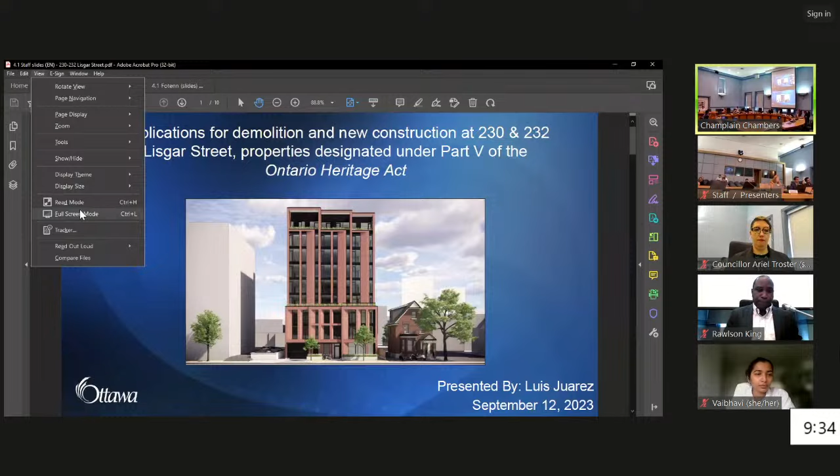So before us is an application to demolish 230 and 232 Lisgar Street and construct a new 9-story apartment residential building. The properties are designated under Part 5 of the Ontario Heritage Act and located in the Centretown Heritage Conservation District. Next slide, please.

The subject properties are outlined in red on this slide. They are located on the northern edge of the HCD boundary, on the south side of Lisgar Street, west of Metcalfe Street, and east of O'Connor Street. Each property contains a 2.5-story front gable house clad in brick, constructed circa 1888, situated immediately east of 3 other similarly scaled front gable houses, south of a 12-story apartment building, and west of an 8-story apartment building. Next slide, please.

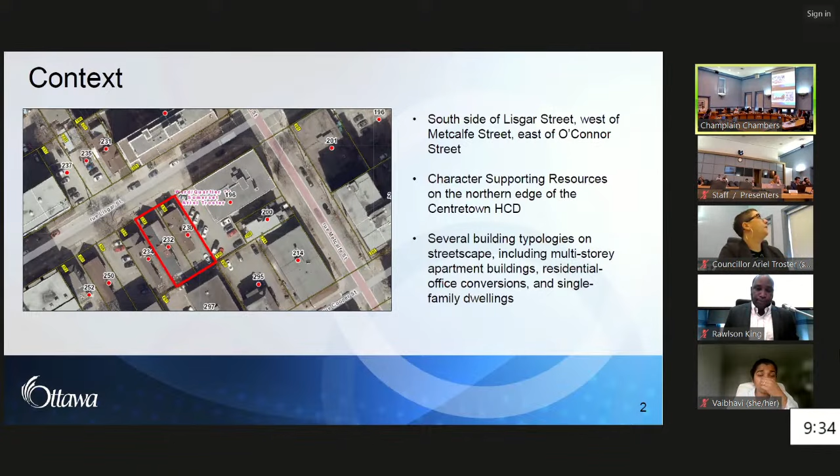These images show the existing conditions of the streetscape and vicinity, with the subject properties shown in red on the left image. You can see that they contain setbacks and heights consistent with the first period of development in the Heritage Conservation District. 230 Lisgar Street on the left has been altered with a 2-story front addition that obscures most of the building's original architectural elements. Next slide, please.

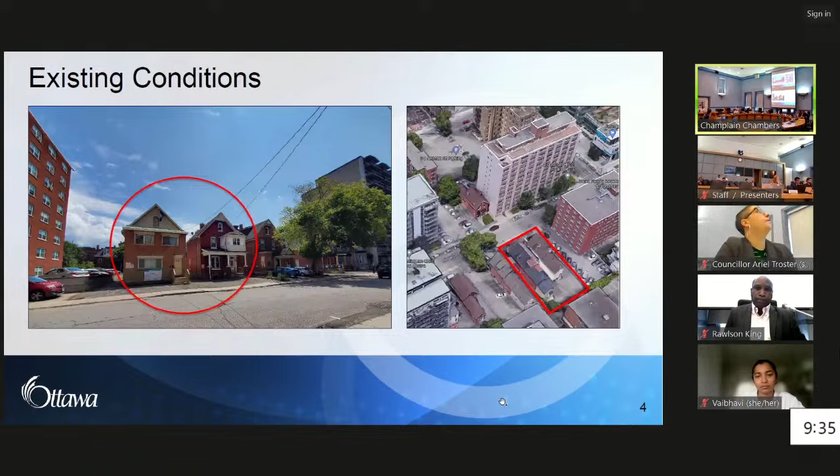As part of this proposal, the applicant proposes to demolish the 2 existing dwelling units, which are both considered character-supporting resources and contributing properties within the Heritage Conservation District. The HCD plan contemplates the demolition of certain character-supporting resources, provided that their removal achieves broader city building goals and that the replacement building is consistent with the HCD plan's new construction guidelines.

As per guidelines for the demolition of contributing buildings in the plan, the applicant has provided an analysis that demonstrates that 230 Lisgar Street has been altered to the extent where its cultural heritage value to the HCD in its current form is compromised by an unsympathetic two-story front addition. That the new building will carry forward some of the perceived attributes of both 230 and 232 Lisgar Street, and that the new building is consistent with the guidelines for new construction and contributes to the city's broader city building goal of intensification. Further, as conditions to the recommendation to demolish the buildings, the applicant will be required to deposit photographs and research material related to the site's existing buildings to the City of Ottawa archives. Next slide, please.

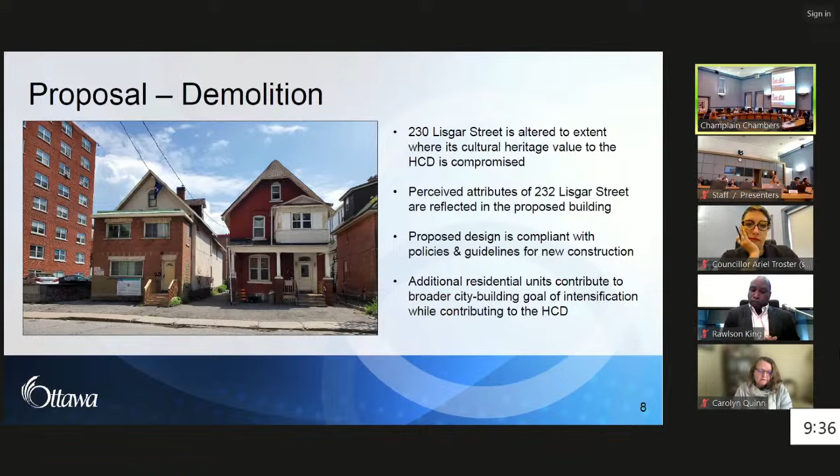The proposed 49-unit building is 9 stories in height. The first image on the slide here on the left is the front elevation as seen from Lisgar Street. Here we see the massing, which consists of 3 distinct vertical bays and includes a 3-story podium and further step back at the 9th floor.

The middle image is of the site plan, and here we see that the proposed building is set back 5.8 meters from the street, providing a transition between the existing building to the east, which protrudes closer to the street, and the existing building to the west, which is further recessed from the street.

We also see the soft-scaped rear yard amenity space, the vehicular access to the underground parking garage via car elevator, and a landscaped front yard inclusive of new plantings, entranceway, and a seating area adjacent to the main entrance.

And then the last image on the right is a close-up on some of the proposed materiality, which consists of red brick cladding on all elevations with perforated metal accents on selected brick returns that mimic some of the decorative patterns found on 232 Lisgar Street's existing woodwork. Next slide, please.

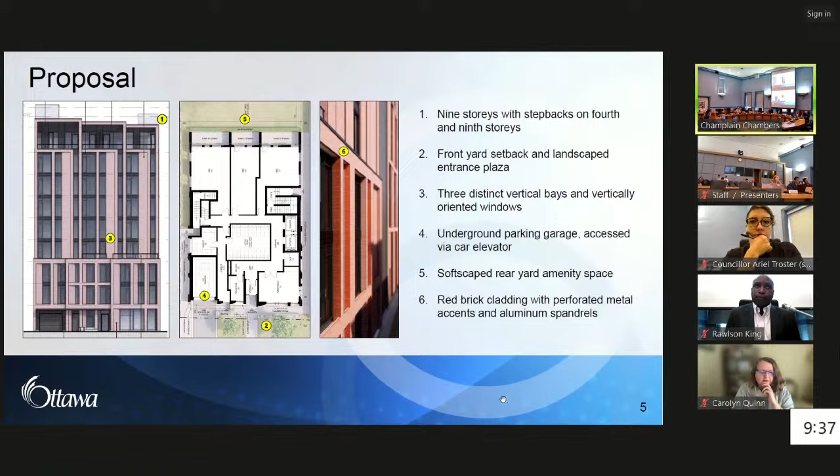Here we have a streetscape elevation along Lisgar Street, demonstrating how the proposed building will interact with the street. The front yard setback will allow for a landscaped entrance plaza that reflects the front porch characteristic of Centretown and eliminates the existing paved condition.

The building's massing, which employs stepbacks on the 4th and 9th stories, will allow adjacent historic houses to the west to remain prominent along the streetscape and to maintain continual datum lines along the row.

The 3 distinct vertical bays and windows will help maintain the streetscape's historic rhythm and provide a successful transition to the neighboring property. And lastly, its red brick and perforated metal detailing mimic materiality that honors the residential character of the HCD. Next slide, please.

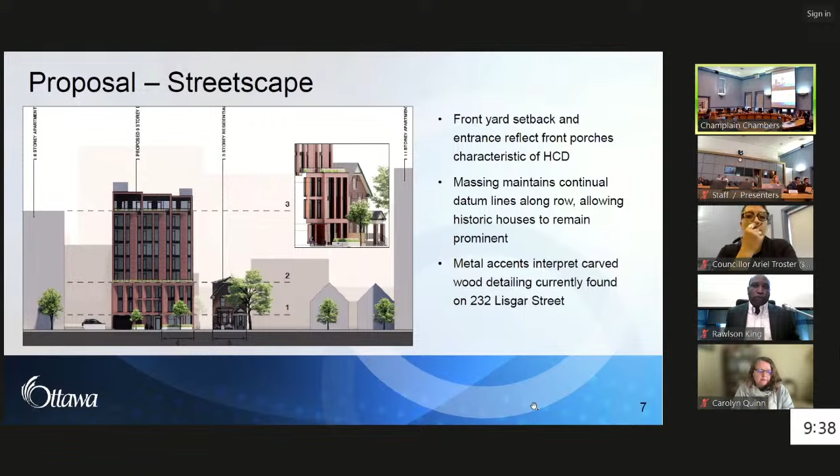Staff are of the opinion that this proposal complies with the Centretown HCD policies and guidelines as they relate to demolition and new construction, and the standards and guidelines for the conservation of historic places in Canada. In staff's opinion, the proposal employs several design interventions to ensure that it contributes to the cultural heritage value of the HCD while achieving the broader city goal of providing additional housing units.

Next slide, please. In terms of consultation, the application submission materials were posted on the city's development application search tool. Heritage Ottawa, neighbors within 30 meters, Chair King and Councillor Troster were notified of the application. And the Centretown Community Association is also aware of the application and participated in the pre-consultation process.

Next slide, please. In conclusion, staff are recommending approval for the proposed demolition of 230 and 232 Lisgar Street and of the construction of a new 9-story building on the properties.

As conditions of approval, staff are requesting that the applicant deposit photographs and research material related to the site's existing buildings to the City of Ottawa archives prior to issuing demolition permits, and that the applicant provide samples of all final exterior materials, including details on the proposed decorative metal patterns, for approval by heritage planning staff prior to the issuance of the building permit.

Staff are also requesting that authority be delegated for minor design changes that might arise and that the heritage permit be approved with a 3-year expiry date. Next slide, please.

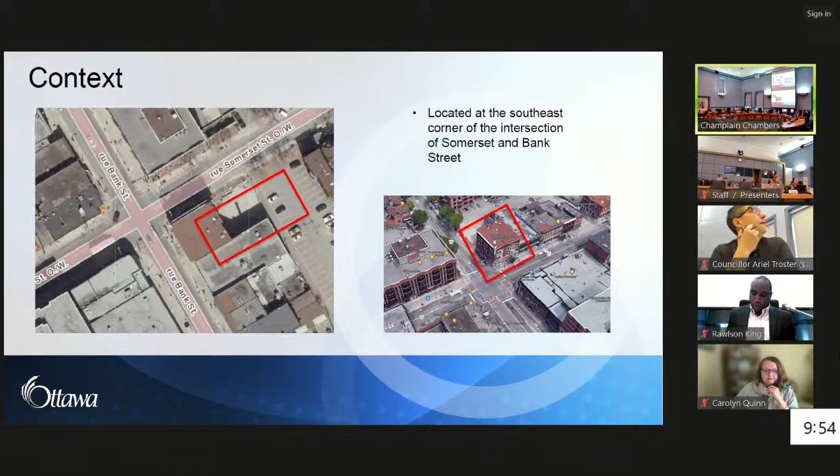Some context and history on the property: it was constructed in 1896 as a department store. In 2007, as part of a renovation project, the building partially collapsed and has remained vacant and deteriorated ever since. It is subject to multiple Building Code Act orders, notices of violation, and property standard orders. It is listed on the city's heritage watch list and is monitored regularly by city staff.

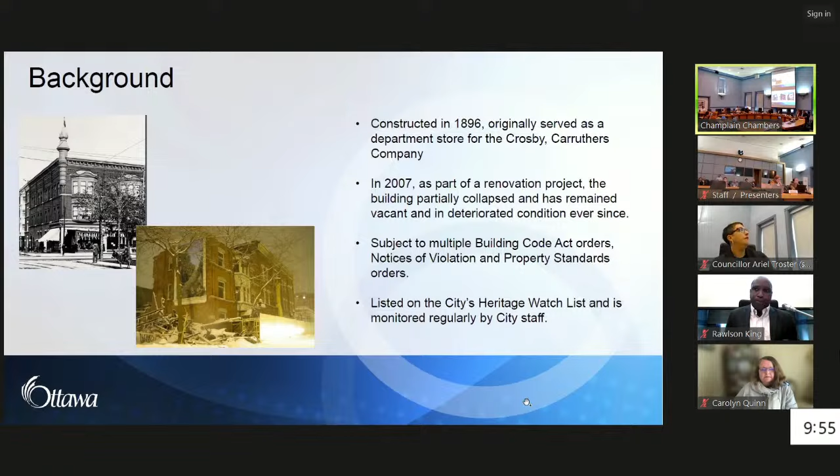These are some photos of the property showing it in its current condition. You can see the deteriorated condition, especially at the rear of the building to the east.

In 2022, Heritage staff brought forward a report to BHC to provide an update and a high-level cost estimate for the immediate urgent work to be undertaken on the building, should the city move to undertake the work. The city has not had to undertake any of the work, as the most critical work was found to not be immediately necessary, and the owner has been working towards compliance with the orders.

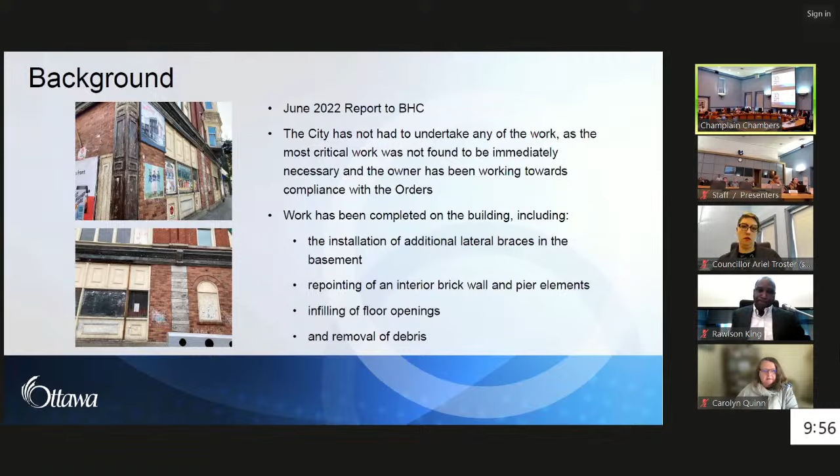Some of the work that has been completed on the building recently includes installation of additional lateral braces in the basement, repointing of an interior brick wall and pier elements, infilling of the floor openings, and removal of debris. Also in these photos, you can see the restoration of the metal cornice at the street level.

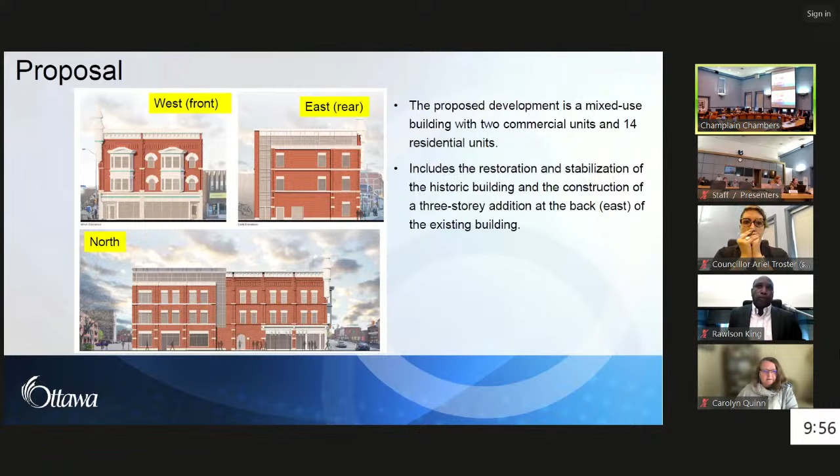In front of you, I think the applicant is here today to do an overview of the proposal, but it basically will be a mixed-use building with 2 commercial units and 14 residential units. It includes the restoration and stabilization of the historic building and the construction of a 3-story addition at the back, to the east of the building.

Some of the rehabilitation elements that will happen: the restoration of the metal cornices and corner turret, replacement of the windows on the 2nd and 3rd story with aluminum windows, repair and repointing of brick, and replacing damaged brick where necessary.

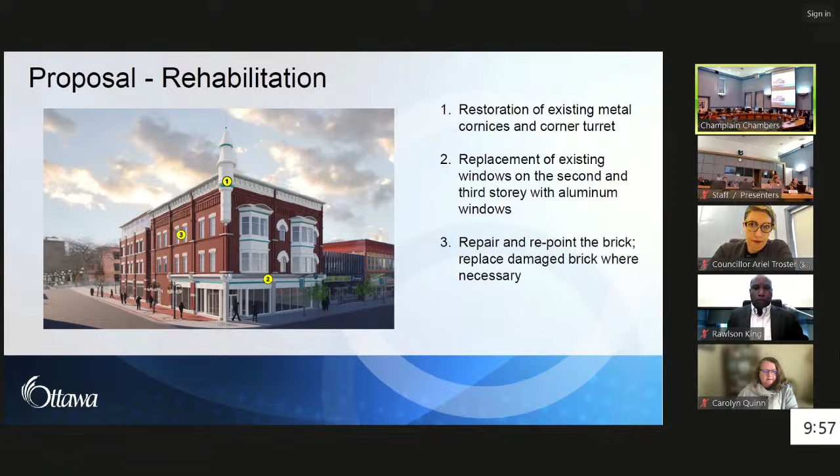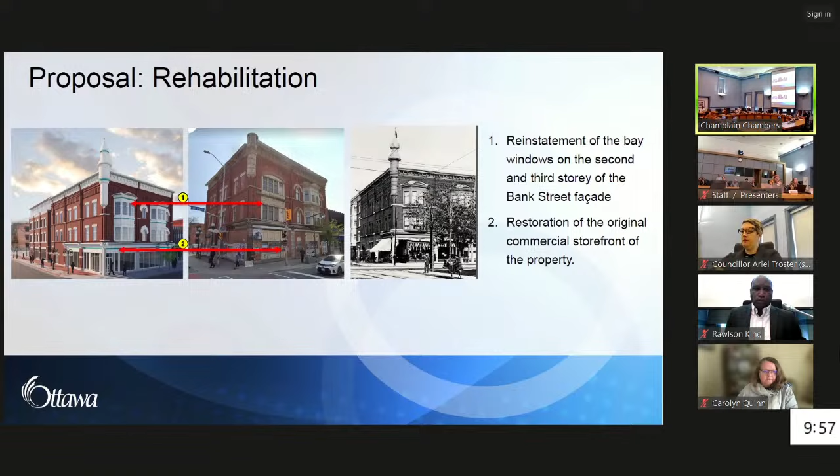This is an interesting component of the rehabilitation, based on historic evidence. It's the reinstatement of the bay windows on the 2nd and 3rd story of the Bank Street facade, and the restoration of the original commercial storefront of the property, including the large windows, the signboards, and those components.

This is a rendering showing the addition. You can see it's a flat roof structure clad in brick and glazing. It's delineated from the historic building by a glass curtain wall. There's secondary cornices that wrap around the east and north facade, and you can see that 3-bay rhythm is sort of echoed on the addition.

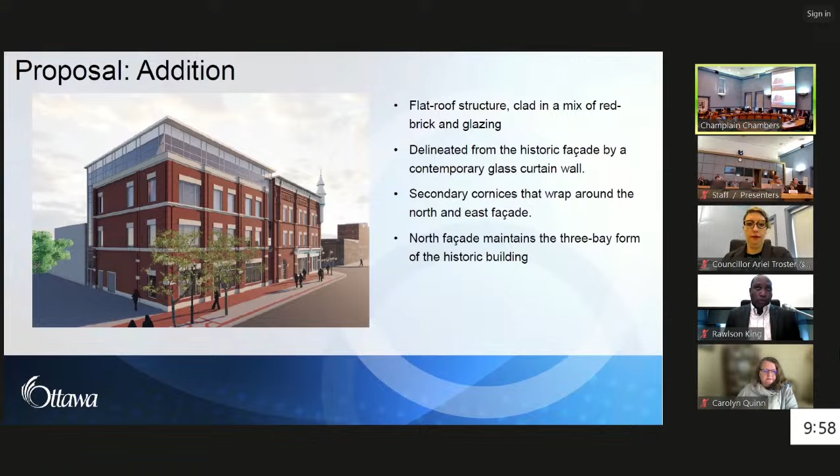Staff have reviewed the proposal and have determined that it meets the Centretown and Minto Park HCD plan, as well as the applicable standards and guidelines for the conservation of historic places. Staff are recommending approval of the application subject to quite a few conditions.

The first is the implementation of the conservation measures in the heritage impact assessment. Those conservation measures will detail the specific restoration pieces that happen to each element of the building, so we wanted to make sure there was a clear understanding of that. The applicant will submit reports monitoring the condition of the structure once construction starts. We'll ask for material samples for any new material to be used, and then the submission of a construction schedule, which will help our colleagues in Building Code Services with their monitoring of the structure and to understand what work is happening when.

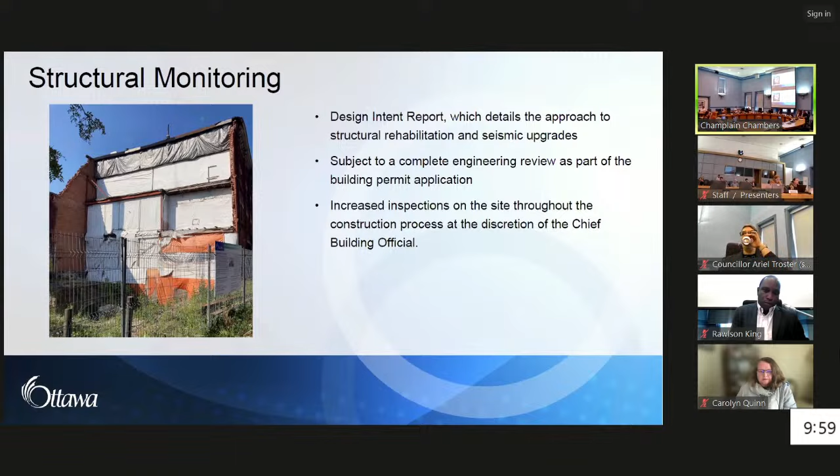Just a couple additional points on the structural monitoring happening, since that's top of mind for everybody. The applicant has submitted a design intent report detailing the rehabilitation approach and seismic upgrades. That document has been reviewed by our colleagues in Building Code Services, will be subject to a complete engineering review as part of the building permit application, and once construction starts, will be subject to increased inspections on site throughout the process, at the discretion of the chief building official.

And that is it. Thank you so much for your presentation.

We do have the applicant team registered to speak. Did you indicate they were going to provide a presentation? They have one prepared and are ready to speak, but it's at committee's discretion. So is there any interest amongst the committee to have a presentation from the applicant? I don't see any interest there. So are there any questions to the applicant team? I see that Councillor Troster has raised her hand.

Hi, thanks for being here. It's nice to see you again. I'm just wondering if the applicant team can speak to the implementation of the recommendations in the Robertson Martin Conservation Report from 2022. Or maybe staff could help.

Go ahead, Sharon. Thank you, Councillor. The Robertson Martin Report was a document the city commissioned to support the June 2022 report that came to this committee, outlining all the immediate urgent work that would have to happen if the city was to undertake the work. It's a city document, so we can't require the applicant to use it. But as you'll see in the Heritage Impact Assessment, it's a reference document - the Heritage Impact Assessment referenced it and implemented a lot of its pieces into the conservation elevations and conservation approach. That's what we've tied them to through the first condition in the recommendation.

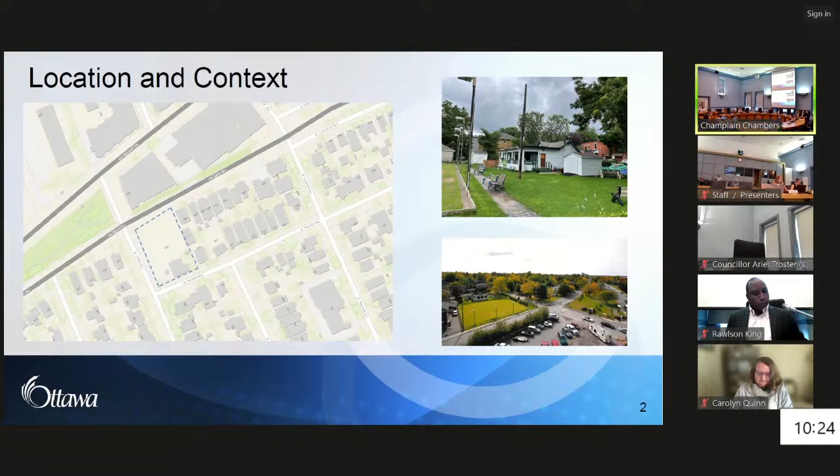The designation of properties in Ottawa is guided by the provincial policy statement, the Ontario Heritage Act, and the city's official plan. Additionally, Ontario Regulation 9/06 outlines the criteria for determining cultural heritage value or interest. Recent changes to the Ontario Heritage Act via Bill 23 allow properties to be designated if they meet 2 or more of the 9 criteria specified in this regulation. Our assessment indicates that this property satisfies 6 out of the 9 criteria.

In 2022, City Council listed this property on the city's Heritage Register. However, under the implications of Bill 23, the property would be removed from the register unless Council issues a notice of intention to designate it by December 31st, 2024. Furthermore, in 2022, City Council instructed staff to conduct a thorough analysis of properties in Ward 15 that are already listed on the city's Heritage Register, with the aim to proactively designate them under Part 4 of the Ontario Heritage Act. This directive, coupled with the amendments brought about by Bill 23, has led staff to review all listed properties in Ward 15.

Now we'll speak to the property's cultural heritage value. The property consists of a large lawn bowling green, a 1.5-story clubhouse, and outbuildings. The clubhouse, built in 1914, has a simple design typical of early 20th century sports facilities. It features white siding with green accents and exhibits characteristics of early 1900s lawn bowling clubhouses. Despite several alterations, the property maintains its form and purpose, representing an early 20th century lawn bowling club with a spacious green and a functional clubhouse.